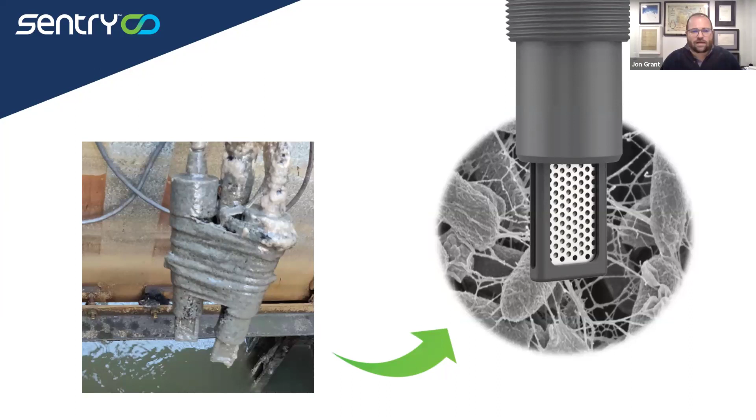It's still, those two probes still haven't been cleaned, and they are still reading the same, or reading in parallel. And why is that? It's because at its heart, if you look at that's an expanded view of this tip right here, you can see through it.

When we think about wastewater treatment, biofilm is consuming carbon. That's all it does for a living, and that powers all biological treatment processes. What we've done here, if you're familiar with microbial fuel cells, this is just a microbial fuel cell where, rather than trying to generate energy from it, we're counting that flow of electrons.

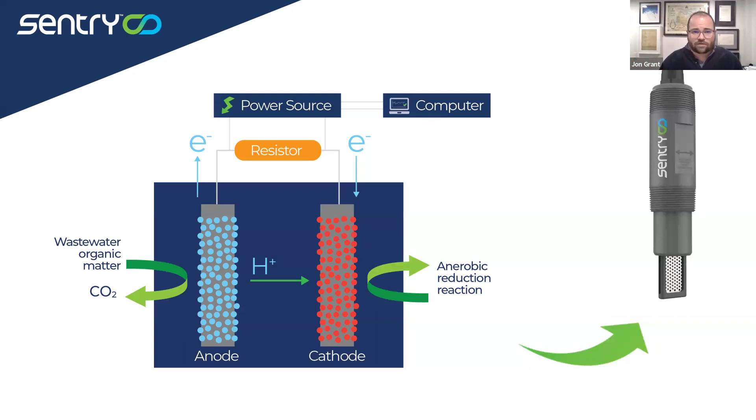As the biofilm consumes carbon, it deposits electrons onto our probe, and we count that, and that's how basic biological electrode sensors work. So what happens is it ultimately is basically like a Fitbit for your plant's ability to treat the incoming wastewater. That becomes a very powerful tool, and we can talk about how it's being used and applied by a number of different groups globally.

Again, what does a bioelectrode sensor measure? There are so many different ways to measure organics: COD, TOC, BOD5, CBOD5. What this is really measuring is the consumable part of BOD, or in the case of a digester, VFA. Those are the two main applications: influent variability monitoring and digester optimization. It's monitoring at what rate the biofilm is consuming food.

It does compare very favorably to a BOD5 lab sample. It's very similar to RBCOD. We've been tested against pretty much every type of organic metric, and where it differs from something like a BOD5 is if there's an industrial discharge that's toxic. The lab sample will be the same number, whether there's a toxic shock and an inhibitor or not. But a bioelectrode sensor will still pick up that the plant is less able to treat the incoming wastewater.

So it becomes very powerful for real-time operations and decision-making, almost like a supplemental tool and a way of the biology telling the operators on site or remotely that there's an issue and that possibly a change needs to be made.

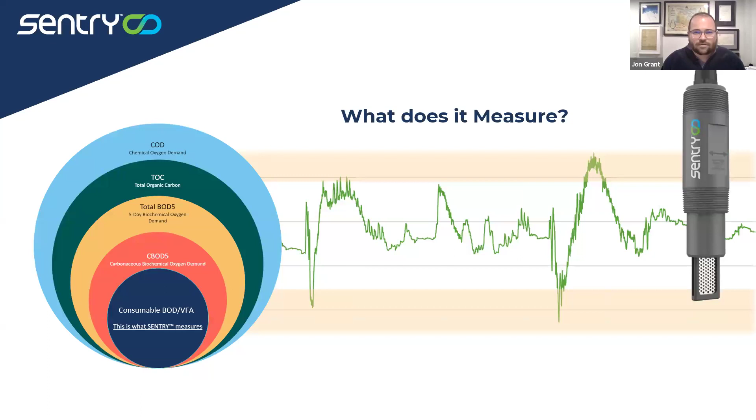So what does it actually look like? This sensor takes a reading once a minute. A normal, happy plant with no industrial discharges, no inflow and infiltration issues, is going to have a nice diurnal trend, kind of like how there's a flow diurnal trend, but for quality, it doesn't take a lot for an industrial discharger to mess up a plant.

At our home plant, just near our headquarters in Prince Edward Island, there's a town of 3,000 people, and a microbrewery will throw off their treatment processes. It doesn't take a lot to knock it off kilter. This plant right here can very much look like that plant, and the flow is the same. The smell may even be pretty similar, but the outcomes are very different, and it causes the operators and operations team to possibly get a bunch of flack for something they may have not caused, because you don't always know what's coming into the plant.

One of the fun things we've learned through monitoring around the world is there's one universal truth for almost every wastewater plant in the world: if there's an industrial discharger, they will discharge at 4 o'clock on a Friday, and it hits the plant between 5 and 6, and everything goes out of whack, and it messes up your dinner, depending on when you eat dinner.

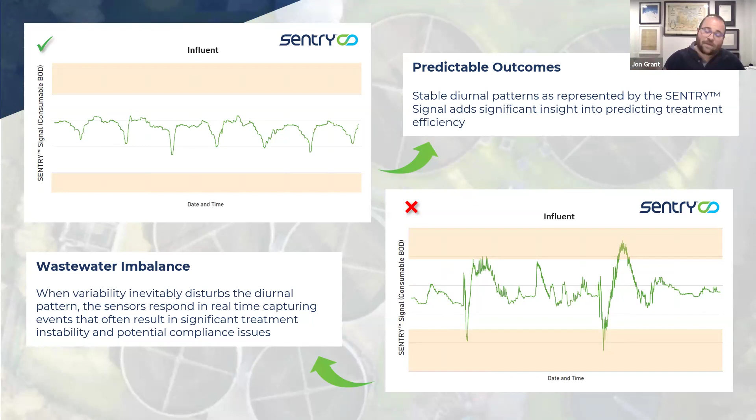So how it's used - there are 3 main places we've deployed these and seen how they've been effective. Where there are industrial dischargers causing issues, you can put these in collection systems, pre-treatment sites, and lift stations. They need power, and they help identify much further in advance what's coming down the line. This has been done in places like Phoenix, it's going into Salem, Oregon, and Singapore PUB is probably the largest such deployment I've seen, with 6 industrial dischargers, 3 lift stations, and the headworks.

It's interesting to see how a big spike or toxic shock flows through and gets diluted out, but some of them don't, depending on the strength and time of day.

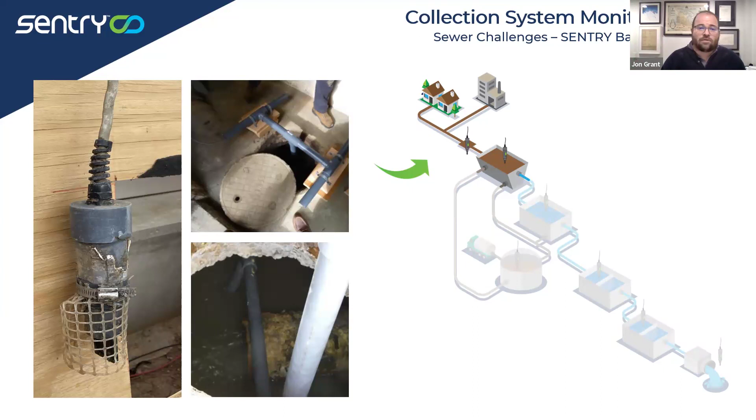So what we're looking at here is industrial dischargers hammering the system with toxic shocks, cleanouts of tanks - could be any sorts of chemicals, heavy metals, things like that. Conversely, we're deployed downstream of a Red Bull plant with industrial discharges of organics, and it's very cool to see that Red Bull also gives the biology in the plant wings too. They love it - it supercharges their day.

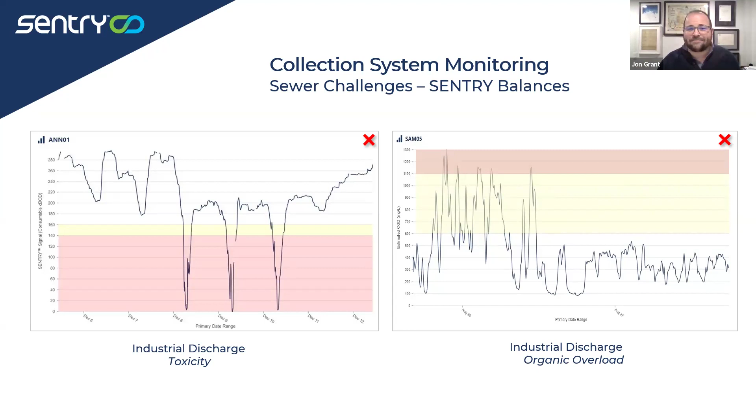The most common use we've seen is influent monitoring - headworks or primary clarifier, depending on the configuration of the plant. Mounted in a tank or mounted in a channel, that's really the best place to monitor for optimization or understanding what's coming in, because the clarifier headworks location is the extension of the collection system, but it's also the furthest forward point in the plant.

Great question, Erwin. Sorry, I'm seeing that, so I'll throw the answer in right now.

FOG will have an effect on it - I can actually show you how FOG interacts with it, or how FOG additions interact with it, with anaerobic digesters. When installing this type of sensor, it's great as long as it doesn't get bags or rags on it, or if there's odor control or ferric dosing, or hydraulic dead zones where FOG can build up, because really they're designed to be in the flow, with the biofilm on the surface able to consume a representative flow. Hopefully that answered your question.

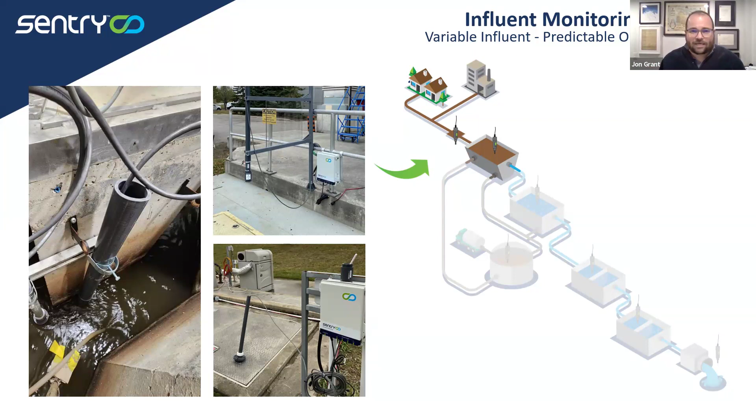So at an influent location you can see a lot of different types of patterns and issues - high organic loadings, you can see that spike up; industrial discharges with acute toxicity, you can see that coming down; and then dilution from rain events.

In the standard operating procedures developed by the engineers and folks we've collaborated with, the first question when there's a low signal, to diagnose the issue, is: is it raining? Then there's a series of cascading questions based on whether or not it's raining, and how to treat the incoming wastewater and potentially make changes.

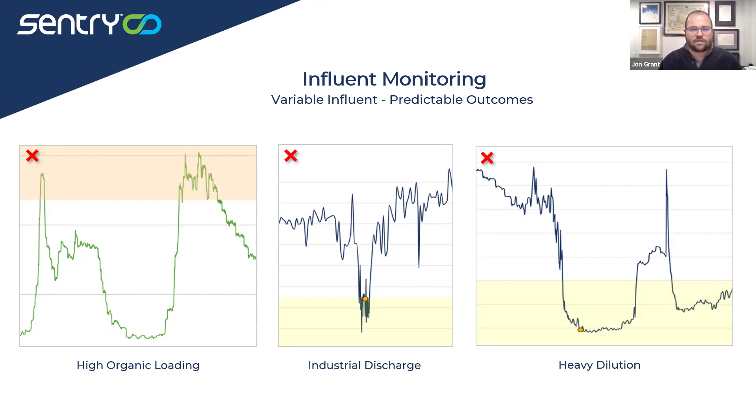Our team, and I'm sure other teams at other groups, are developing machine learning tools to quickly identify what type of issue is being picked up by the sensor. There are a number of case studies that the groups have used.

I'll dive into the Frankfort one in a bit, but Sewer Authority Mid-Coastside in California is reducing their non-regulatory sampling by 90% because they just relied on sampling at 9 a.m. every day - you're going to pick up whatever was happening at 9 a.m. every day, and that may not pick up the things that cause plant issues.

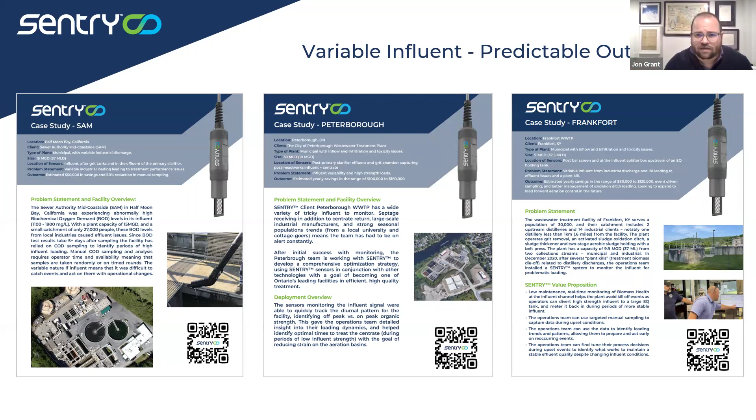Peterborough - that was a fun one, they're actually just up the road for me. Their plant turned blue, which could be toxic. Their historical method was to ramp up aeration, start sampling, change some chemical dosing - but a couple times we picked up that it was just food coloring from a food production facility, and food coloring has no impact on treatment, so they were able to save quite a bit of cost and time. And then I'll dive into Frankfort for anyone who likes Buffalo Trace - that's where they make that.

So the other most common use is digester monitoring, looking at digester health. First off, looking to prevent any souring events, because downtime, souring, and reseeding costs too much money. The others are to optimize biogas.

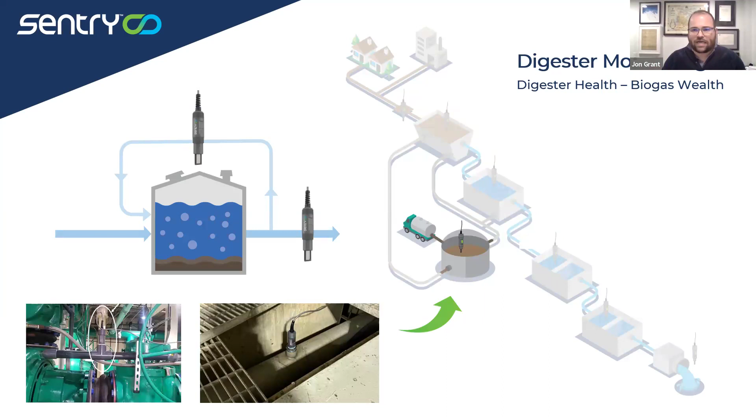This type of sensor is very useful because it's a leading indicator of biogas production, because it's essentially monitoring the consumption of VFA, which allows for a good understanding of biomass health and whether it can take in the organics currently being discharged to it.

So what that looks like in digester monitoring is this: this is what happened when a system was restarted. Rather than having to load, test, wait for 3 days for a VFA analysis, load, test, wait, it can be done in more real time. This was done in agricultural digesters, two in Ontario and one in BC, to understand its effect.

The other interesting point is that because it's a leading indicator of biogas production, it's great. As you're driving more and more organics into the digester, those two signals will match. It's when they diverge, when biogas production plateaus and the organic loading signal still goes up, that's the maximum loading that can be done within a digester.

So then it's all about setting the risk tolerances, 10, 20%, whatever the tolerance for the specific plant is, to a point where it can be monitored and optimize that renewable energy. It's also been used to prevent digester souring events and pick those up earlier than other types of tools.

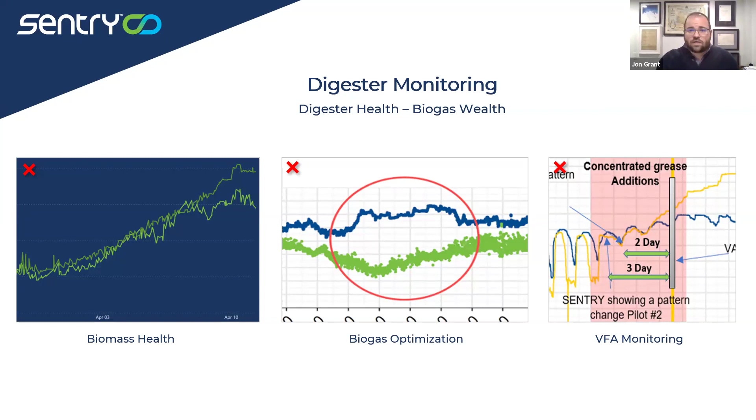So in short, when looking at a real-time signal over the course of days, ideally life is good, it's in a good band. But the second organics start to ramp up within a digester, you start taking corrective actions at a certain point, and immediate actions if it gets to a certain high point, or if toxicity gets in, taking countermeasures to prevent that from destroying the biomass health.

Any questions before I jump into two case studies and how plants like yourselves are using this?

You mentioned something about the fluctuation in near real-time monitoring of signals. Do you have some of these challenges in terms of your fluctuations in real-time data with the signals, as it were?

Great question. So the fluctuations, it'll pick up whatever food is available to it. What we've seen is, if we're right near a pump, we'll see the pump cycles, the pumps turning on and off. If we're on a recirculation line, we'll see that, because the bugs just want food, same as how your plant will operate. They'll just want that food.

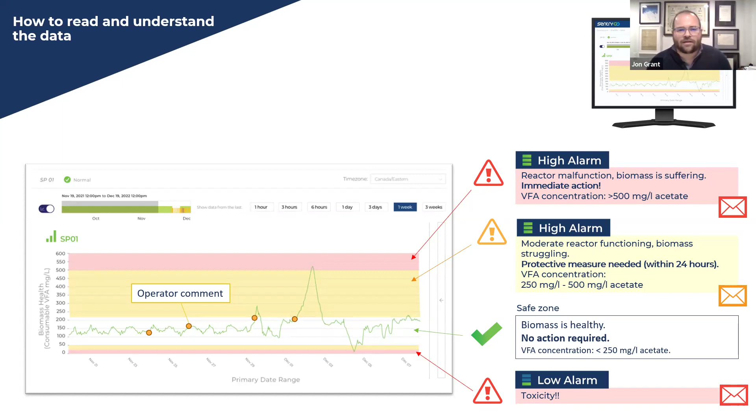Did that answer? Great question, by the way. Yeah, thanks. Yeah, that's good.

Perfect. So let's dive into Frankfort, Kentucky first, and then CMSA. Frankfort, Kentucky, not Frankfurt, Germany—when I present this to Germans, they love that. It's home to Buffalo Trace, one of the world's largest bourbon distilleries. Obviously, I love the rum down in the Caribbean.

So this plant has 14 industrial dischargers. Trace is the biggest. They discharge 150 meters or yards from the inlet of the plant. It's a town of about 30,000 people. They do have other dischargers, but really just one massive one.

So what happened for them was, about two months before we started working with them, they had a plant kill. Trace discharged something, they either didn't know or forgot to report it—there are varying stories on why the plant wasn't informed. But the plant manager walked in and could already smell and see that his plant was killed. For 2.5 weeks, they were in violation.

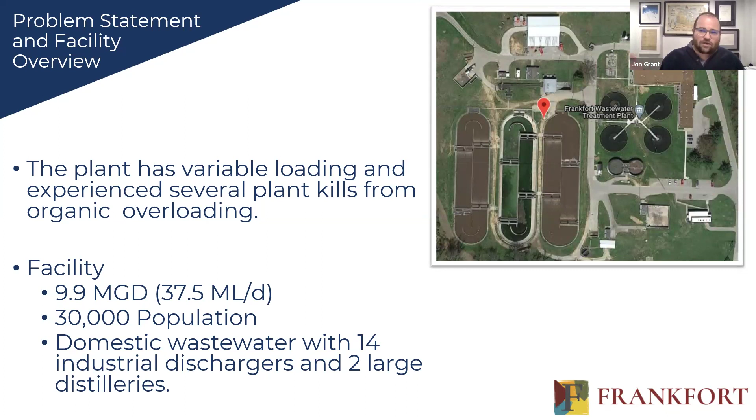He talked to a partner of ours, and the rationale for looking at a BES was the reliability and real-time monitoring to optimize their sampling, identify their loading trends, and fine-tune some process decisions as well.

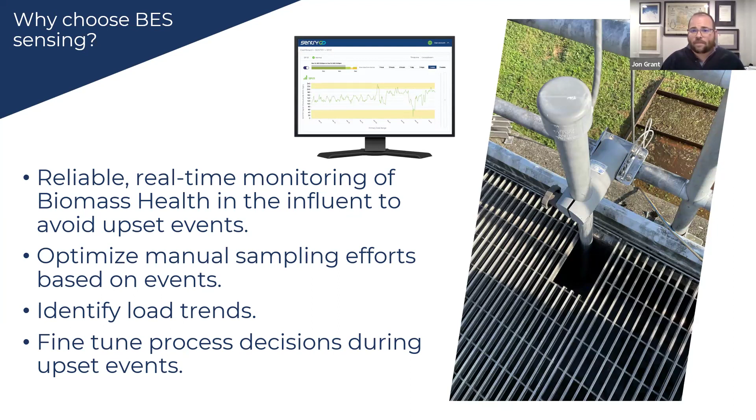This helped them see what was coming down from the distillery. A little spike here from a discharge, fine. A big organic overload there is indicative of something that would actually cause them quite a bit of issue. And this plant suffers quite a bit from rain dilution.

Though it is funny because they also suffer from snow melt. Probably not an issue for anyone here. But there was one time early on, when we were deployed with them in the spring, we called them up and said, 'Is it raining at this plant?' And the comment was, 'No, it's warmer, and all the snow is melting.'

They also, in the first week or first month of working with them, had a big issue every Wednesday at noon. The reason was because they were taking in landfill leachate at one of their lift stations, and the collection systems team wasn't talking with the plant team, so no one knew that. They were also cleaning out their EQ tank at the same time, so they were basically double hitting themselves.

They couldn't figure out what was happening or why they were having these issues until they were able to sit down and have that conversation with the whole team and ask, what's happening at 12 o'clock? So they shifted the landfill leachate receiving to a different time, and that enabled them to smooth out and not have to spend more energy and consumables on treating it effectively.

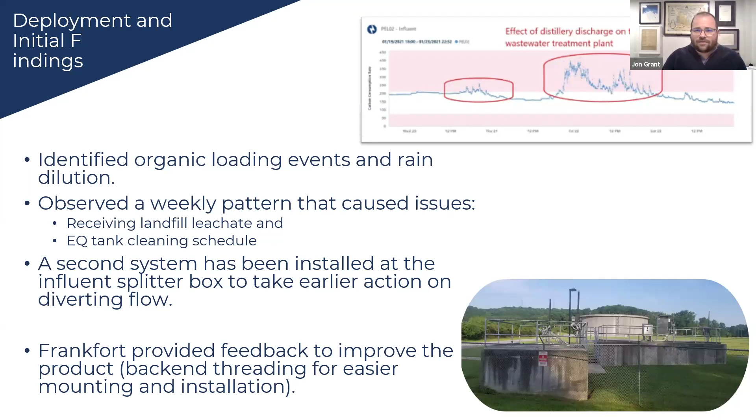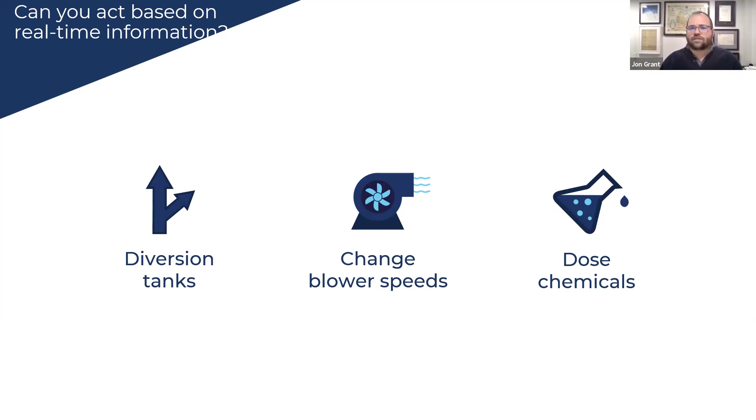All right, so typical uses - they will divert, they'll change their blower speeds in their oxidation ditch, they'll dose different chemicals. With this plant, and there's Carl, their plant superintendent, looking at the dashboard.

They found that they were able to manage their oxidation ditch more effectively, and they're in the process of looking into feed forward aeration control to further optimize that, and they're saving about $100,000 a year through using this tool. They're also looking to put one right at the outflow of some of their larger dischargers like Buffalo Trace.

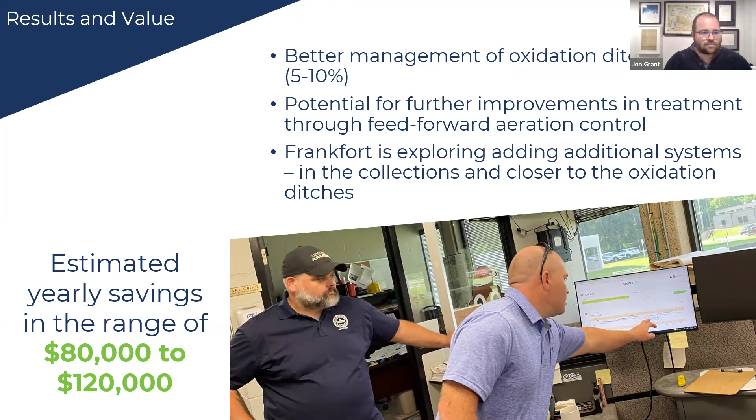I'll hop into any questions on that, or I can hop into a case study on co-digestion and the use in AD. Hearing none.

Great. So Central Marin Sanitation Agency, that's based in California near San Francisco. The plant as a whole began operations in 1985. They've got two 1 MGD mesophilic digesters, and they have a strategic power delivery program. Their entire goal when they upgraded to co-digestion a few years ago was how can they be self-sufficient in terms of production of energy, and sell excess energy onto the grid.

California has had issues historically with brownouts and lack of reliable energy. So this was another way to continue to add energy to the grid, and provide a source of extra income for the municipal treatment plant.

It's no secret that every treatment plant in the world could use more money, so they're able to use this to supplement their cost of operations and improve their plant more, or at least that was their goal. We'll get to the point where they are able to do that. We've been working with them for 4.5 years now.

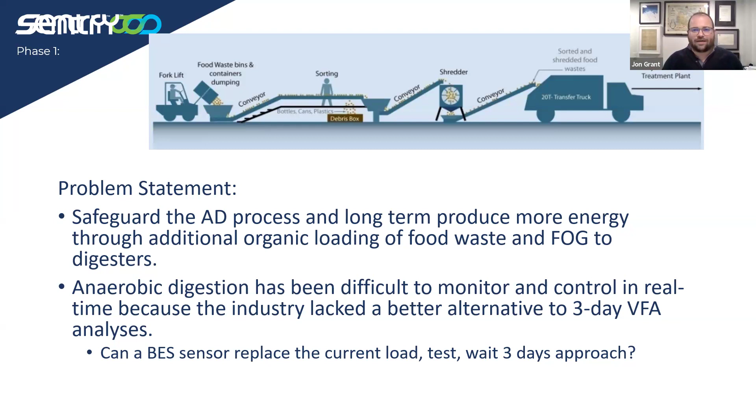In the first phase, it was to identify if these sensors could be used to protect biomass health, and then see if it could help monitor organic loading in real time. The second phase was to use the sensors to monitor that loading in real time and begin to load more organics. We're past phase 2 now and moving into phase 3, to understand if digesters can possibly be loaded beyond the 50% more loading they've been able to achieve through real-time monitoring.

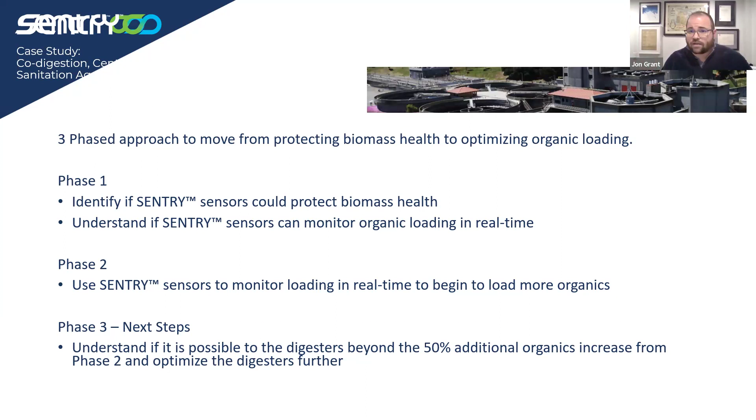In the first phase, they put 2 probes on the 2 pilot digesters. Pilot digesters are much safer to play around with than the real ones.

They were deliberately trying to overload and sour the digester with organic loading. What you're seeing here are the 2 digesters loading, consuming all the food overnight, loading again, and the bioelectrode sensor picked up 3 days in advance of VFA that something was off.

Looking back, it likely would have been even earlier, because even though the peaks remain the same, the troughs are trending upwards. So what it's saying is that the plant and the biomass is struggling to recover, and is starting to take on issues.

So this one was fed all the way through just to confirm, and you can see that they went pretty off. But that gave the confidence that this type of technology could be used to help monitor that.

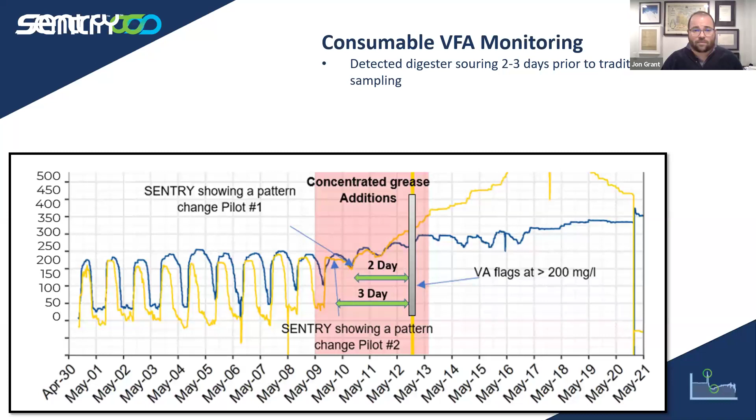We're naturally conservative because we have to be with digesters and wastewater treatment in general. But with digesters, if you get it wrong, there are so many issues you can have that it's not worth getting it wrong. So typically, digesters are loaded 30% less than they could be because of that risk tolerance.

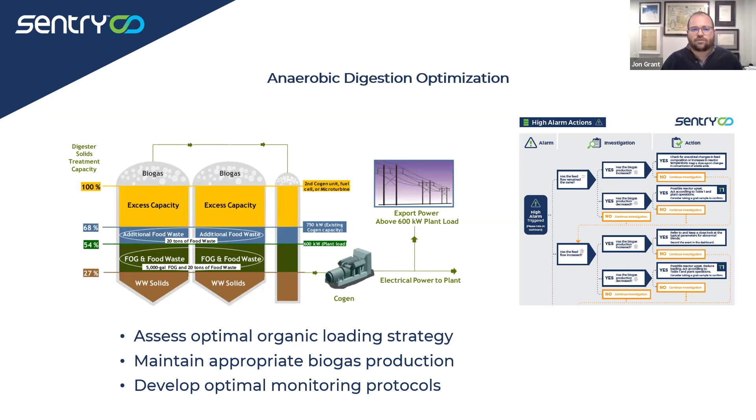So the next phase, moving to phase 2, was basically assessing the loading strategy and developing custom operating procedures for that site to really maintain biogas production. The sensors were able to proactively identify instability, and again show that they could, at the very least, protect against digester failure and downtime.

Then, as they moved to the full-scale digesters, the goal was to increase organic loading to divert organic waste from landfills and ultimately generate biogas. So it's almost a double win of being able to get paid tipping fees for taking in the truckloads of organic waste, and also generating excess electricity.

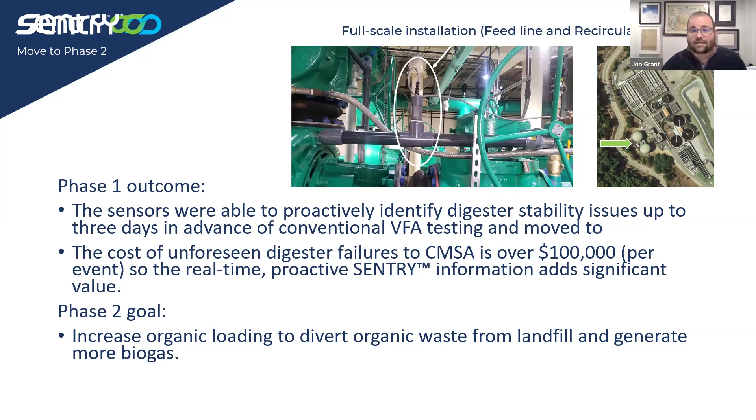What was very cool was that you could see differences in loading in a number of ways. So what you're looking at is April, May, and June of 2021 — this is the normal fog and food slurry addition. They were doing some maintenance, so they stopped taking anything in.

What you see here is actually the baseline of just the organics from the wastewater treatment plant, and you can see a good baseline — happy, healthy, normal diurnal trend. If that was all that was coming in, you'd never have much variability.

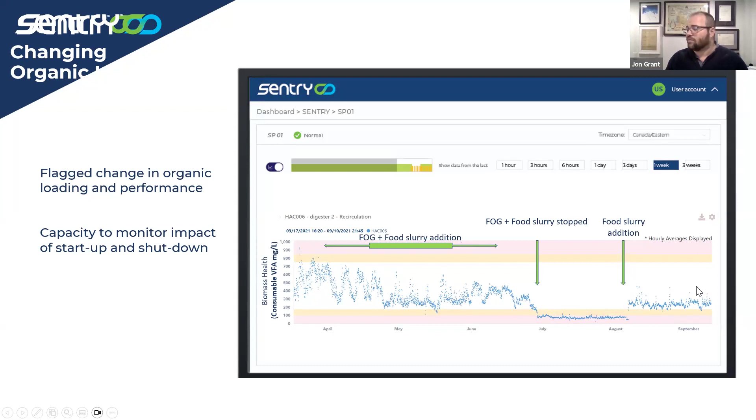But again, the goal was to increase organics addition to generate more biogas. So they started doing it again, with just the food slurry at first, to start getting a good baseline of how to ensure they're starting this up effectively.

Then this is a more granular look. They started to load FOG again, and you can see that the FOG, frankly, the biology and the biomass within there likes to eat FOG. It's much more active, and to take that one step further, they started loading one FOG load every 3 days, and then they began to take in one truck of FOG per day, and that allowed them to have that trust to push through.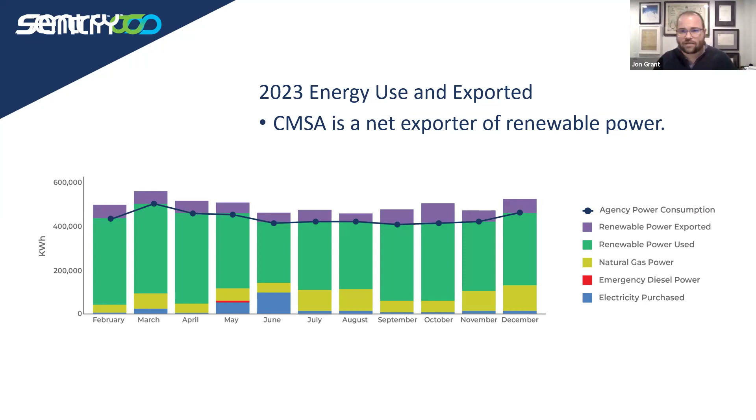So we're a few years on, and now what they're able to say is that they've been loading 30 to 50% more organics for a year, and that's producing quite a bit more renewable power that they can export. So the green line is the renewable power used, and the purple is the power that they're able to export. So the majority of their power is coming from these digesters, and it's allowing them to sell back onto the grid.

So the ultimate outcome was, phase one, cost of downtime imbalance, $100,000 able to protect. In phase two, in conjunction with Stanford University, able to increase organic loading 30 to 50%, which led to a doubling of biogas production and about $600,000 in additional energy, either through not having to buy energy or selling it onto the grid.

So any questions there? Those are the two case studies. Happy to chat about those. A few slides left, and then we can take more questions.

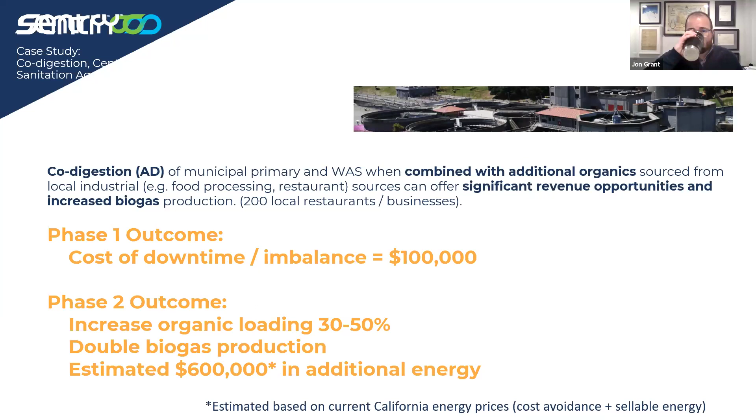Seeing none. So they're easy to install. I've installed them before, and anyone will tell you that that means it's pretty easy. It plugs into a wall outlet, so standard North American plug. The second that happens, the universal SIM card starts sending information to the cloud, and you're able to see that data live in real time.

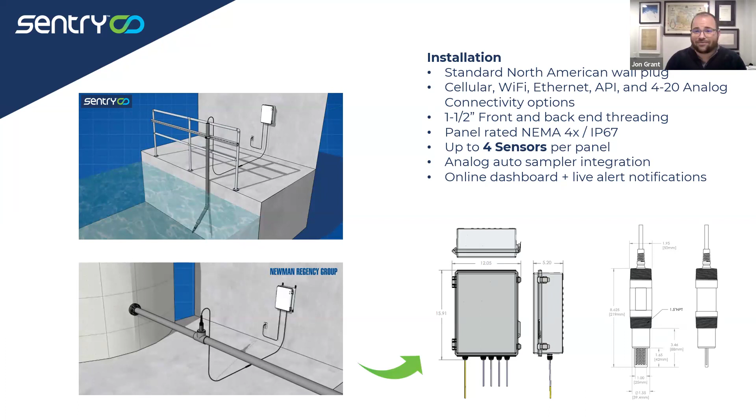The most typical installations are either tank or channel mount, or threaded into a pipe. I've installed them in 35-40 minutes, which speaks to how easy they are to use. A standard system comes with two sensors, because that way you can look at the beginning and end of a process and see how the treatment performed.

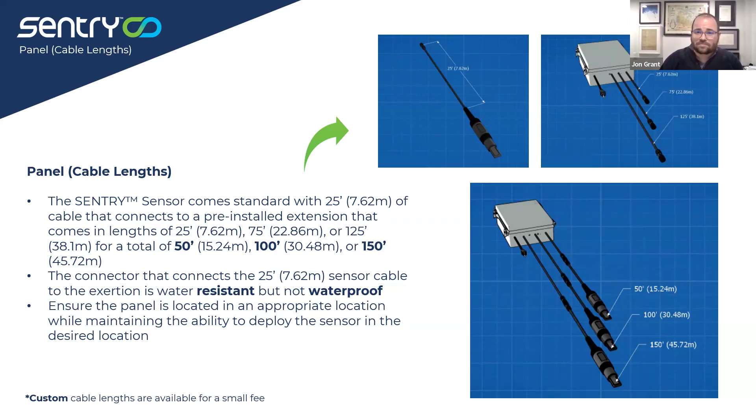It goes back to the roots of wanting to monitor a package treatment plant at the influent and see how that performed at the effluent when it was out in the desert in Algeria, and being able to monitor that back in Canada. So you get quite a good wingspan, 150 feet in any direction with cable lengths. Like I said, installation's a breeze.

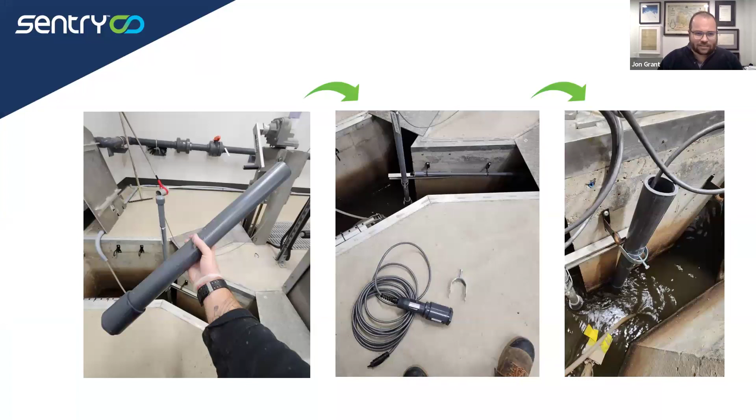And cleaning is the key thing. Like I said earlier, this type of sensor wants to be in wastewater. If, however, you get something metallic lodged between the two electrodes, the easiest way to clean it is squirt water between the two electrodes and get that out of there. Otherwise, we send a box of toothpicks inside the panel, which, if we forget to tell people, leads to a bunch of questions as to why are you sending me toothpicks at a wastewater plant.

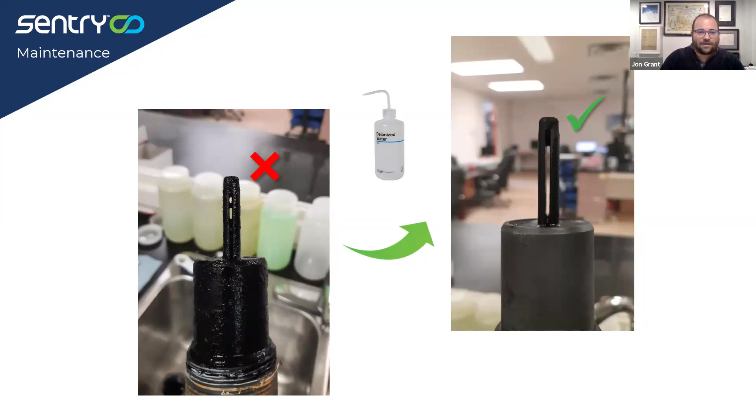Yeah, it's being used in quite a few applications. Aeration optimization. We're doing some feed-forward aeration optimization with a few partners. Nutrient management, effluent monitoring, auto sampling, industrial discharges, and starting to develop more on the machine learning and AI insights and reporting with ourselves and partners.

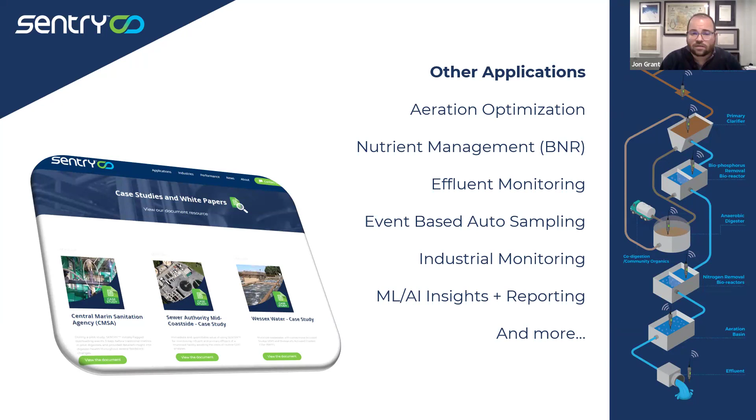Yeah, this is just a quick, I'll skip over that, but essentially when this is deployed, it's deployed with the equipment, but also training online through smart people like Iker, who's on the call. And they essentially act as an always-on person to support your operations team in making decisions, because there's 6 or 7 people on our team who all day, every day think about this signal.

And so every treatment plant is unique, but the problems that treatment plants face happen quite often across the world. So there are some really smart people that work in this type of field that folks that we collaborate with are able to call on at any given time. So that's about it. The goal is to know early so you can act. Happy to take some questions, and thank you for having me.

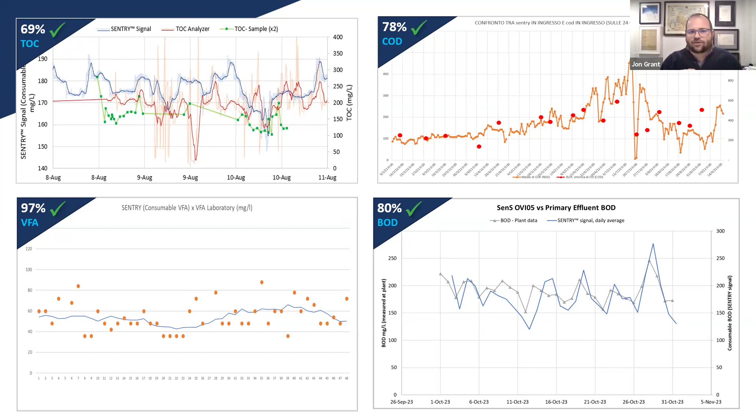Did that answer the question? I went a bit more in depth. I can show you the longer deployment here, where you can see the screen grab of the two sensors moving in lockstep after they were deployed. That was the one that I was discussing early in the presentation.

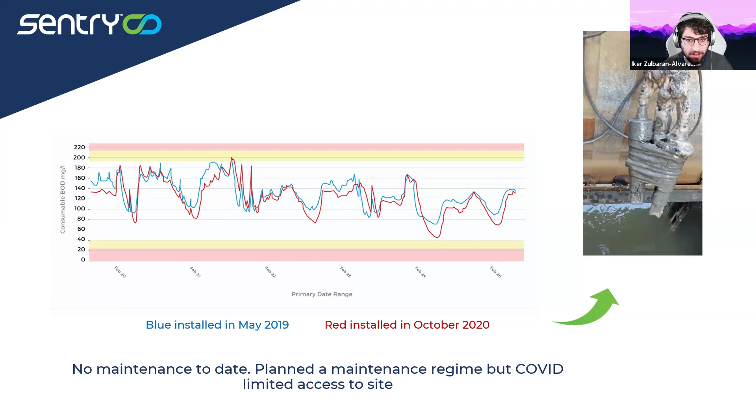Oh, cool. Iker was writing: using DO levels in a bioreactor. Yeah, I think Iker has also responded to a question in the chat which asked, could you review the application in activated sludge? And he says, for organic loading detection and trends, figure out if there is high loads of organics or toxic materials on its way to the basins. Yeah, so it was basically what Jon explained, just put it in words. Right.

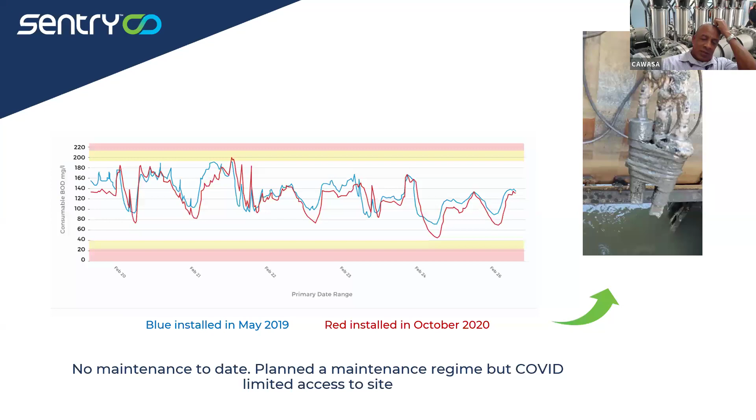You have had quite a bit on, well, I guess traditional treatment plants, mechanical treatment plants. Would that mechanism work in the case of some of the nature-based systems, such as a constructed wetland? Of course, we'd have to do the effluent testing before the water is released into the natural environment. Great question. We've done some lagoons at pulp and paper facilities. The short answer is yes, we could do it. It's robust and reliable. We've had them outside in northern Canadian pulp and paper lagoons, and we monitor a couple of lakes in Florida that are used for recreation.

The question would be what changes could be made based on the signal, whether it's loading alterations or anything like that. So I'd be happy to discuss that and whether we would actually be a right fit for the economics of that circumstance. Okay. And we're pretty open and honest. If we don't think it's going to work, we're happy to say no and try and recommend a better solution.